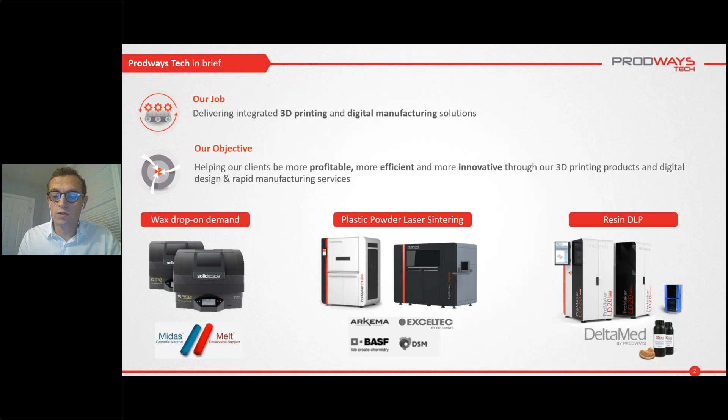In terms of printers, we have 3 product lines: wax drop-on-demand with the Solidscape brand, plastic powder laser sintering printers, and resin moving light DLP printers. Today, I will be focusing on the plastic powder laser sintering and the moving light DLP products, which are the ones most commonly used in industrial application and digital manufacturing.

So the topic today also is about how do we make sure that we work with our customer priority while we continue to develop our 3D printer and continue to innovate to make sure that we maintain this high quality, high throughput, and continue to drive the adoption of additive manufacturing while lowering the AM costs.

So what are the challenges of the digital factory today? What are the challenges that you're facing when you onboard 3D printing as the first printer to use it as a manufacturing solution, or as you scale up and onboard more and more printers to manufacture what you have to do? So the first aspect that we are looking at and considering is productivity.

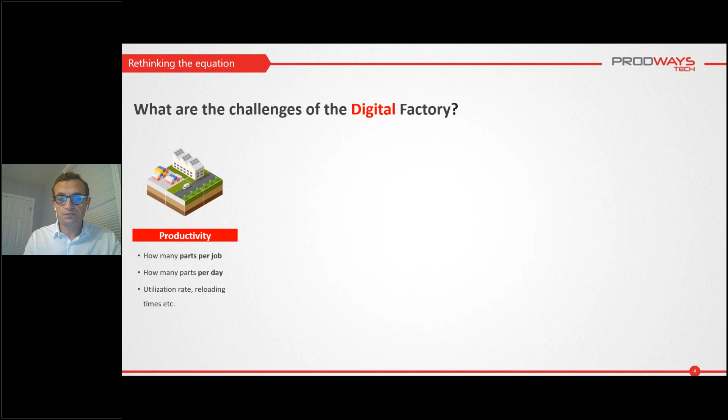Already productivity has to be explored according to various considerations. How many parts per job can you do? How many parts per day can you do? Which is a different view of the productivity, but also overall throughout the year, what is the utilization rate of your printer? How many hours per year have you been using the printer? What is the time off that you have using this printer? So we'll get a deep dive on these topics.

In terms of cost per part, again, there is various ways to look at the cost per part. You can look at the amount of material that you have been using to build that part, but you also need to look at the fully loaded cost per part, where you get the amortization and maintenance of the printer that is taken into account, consumable, but also other side effects, so that's the inefficiency of your printer and the hidden costs that you may see in using the printer.

Finally, part quality, that's an essential aspect of 3D printing. Of course, 3D printing will give you a lot of unique features, like the ability to manufacture individual parts, the ability to manufacture any volume of parts. But quality is also a challenge compared to traditional manufacturing solutions, such as injection molding for plastics. And so we want to have the highest possible resolution to maintain details.

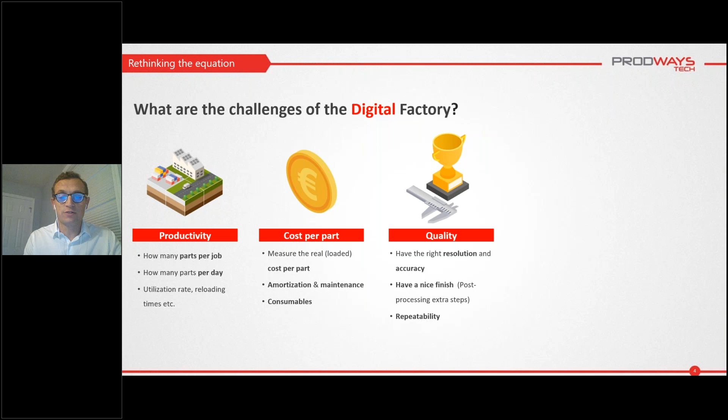We need to keep accuracy, have a nice surface finish, and also part of the quality is also the repeatability. How do you make sure that all the parts are the same from one printer to another, one day to another, or from one corner to the other corner of the manufacturing? So these are all the topics we'll look at in detail.

I will be focusing the examples on these two printers. The LD Dental series is a moving light printer from Prodways, which is a resin-based SLA printer, and the ProMaker P1000X, which is our latest addition in the SLS family, and that is now available at full scale with all our material.

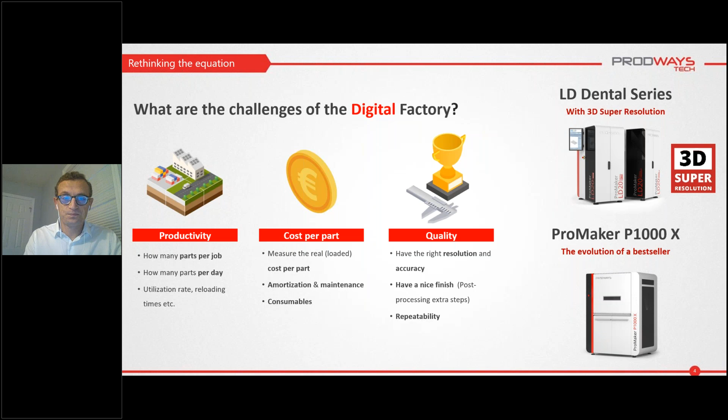So let's start with productivity. The first level you want to consider to make sure you have the highest possible productivity is at the printer level, at the job level.

For that, it's simple. You want to look at the technical spec of the machine when comparing different machines. Usually this productivity is directly related to the power of your machine, whether it's watts for the laser or watts for the lighting engine in an SLA or DLP printer. All that will tell you how fast you transfer energy to the material to make a part. Also, the build envelope gives you more volume and allows better use of the same job. So that's two aspects to consider.

Second, you want to look at the full cycle in terms of productivity. How long does it take to prepare? Because if you can print in 1 hour, but it takes you 1 hour to prepare the printer, that's really the cycle you want to look at. How fast can you reuse the printer? It's important to take good care in listing all the steps when using the printer, and also think about operations that can be done during nights and weekends. How do you optimize the long weekend print? That's also a topic to consider when you look at the full cycle.

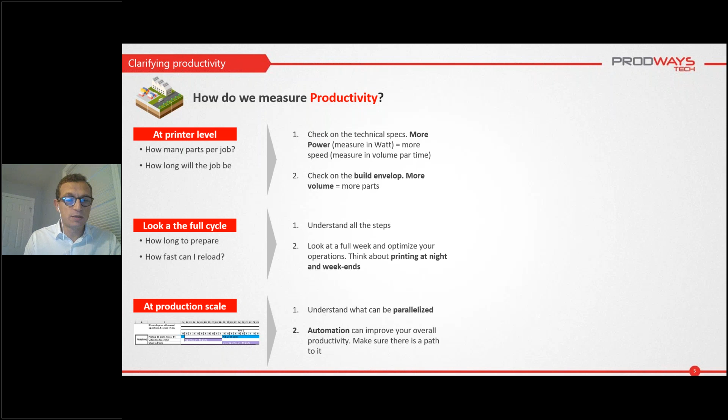Then you have the larger production scale, and this is a small example of a chronogram that some of our customers use to evaluate how they're going to use and assess the printer. It's important to understand what can be parallelized. If you have two printers, you may have the same person reloading one while the other is printing, and so on. Also, automation is the next step to improve your productivity, so you want to make sure there's a path to automation with the printer you're using.

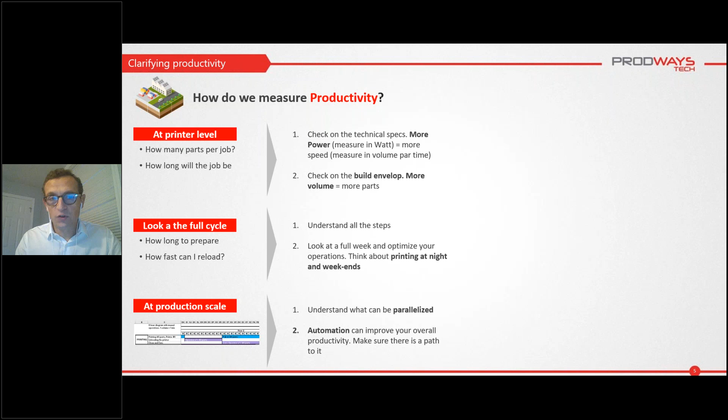So a few illustrations of this consideration on the products I was mentioning. On the moving light, for example, we have the LD20 that has two projectors, giving twice the wattage and twice the power. As a result, the printer has 30% more speed. Only 30%, because the printer is not always lighting - there are other steps where the platform moves and material is put back for the next layer. That explains the difference.

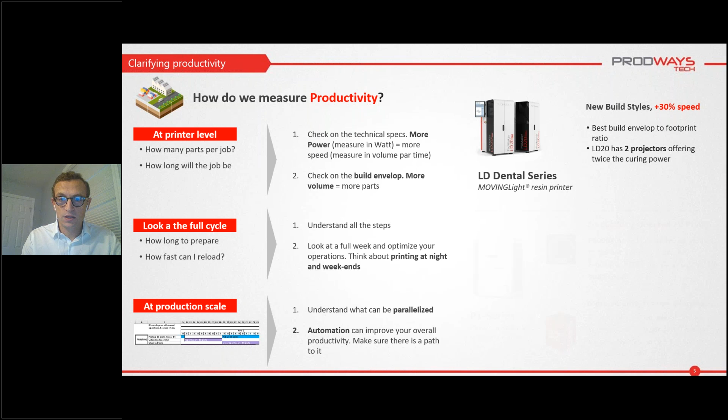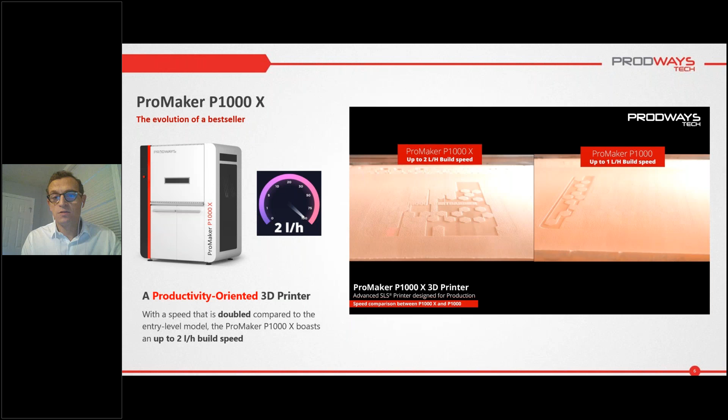We also worked on the software to play with various layer thicknesses and build styles, allowing for more speed. Same example on the P1000, and we'll see it on this video. The P1000X is an evolution of the P1000. It's been optimized with a new software approach, but also a new laser. You can see the comparison on the left side, which is the P1000X, and the right side, which is the P1000 - the video is now in real time. With the new software and power, we actually achieved twice the speed on the P1000X compared to the P1000.

Of course, there are many other aspects to consider when looking at the overall picture, but you can see immediately that comparing item to item from one printer to another, you'll be able to make sure you get the productivity you want, whether it's from a single job to the entire week, assuming how many parts per day you need to manufacture. That's actually the target you usually consider - how many jobs or parts you want to do - and you should build your solution from there.

So yes, as you see, the image on the right is just finishing the layer, while the image on the left is finishing the second layer, and that's really the example of the difference we have.

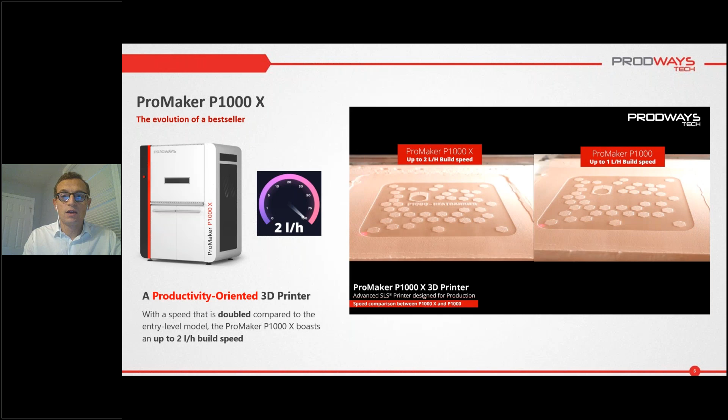So let's talk now about part quality and what it means for 3D printing part quality. The first aspect is, again, the core specs about resolution, accuracy, and I should say also precision - what is the smallest detail you can print. Also think about surface finish - all these printers, whether laser-based or image-based, have the ability to use the right software and algorithm to improve the way energy is transferred to the material to get a better surface finish.

So you want to check the technical specs again. Usually only resolution is mentioned, but sometimes people give accuracy detail, repeatability - how can you get the same position of the laser beam - and that will give you the right understanding of the kind of resolution you can achieve.

Also an important factor - quality can depend on material. The instructions for use, the kind of document provided with the material, will give you detail about the minimum wall thickness feature you can represent with that material. Also, especially with powders, they're not exactly all the same granulometry depending on their manufacturing process, and some materials will provide a smoother surface finish than others. So that's a starting point.

Second, it's about repeatability. If you get a nice part, how do you make sure that all the parts you produce on the same day, on two printers sitting next to each other, and across the year and across the build platform, are consistent?

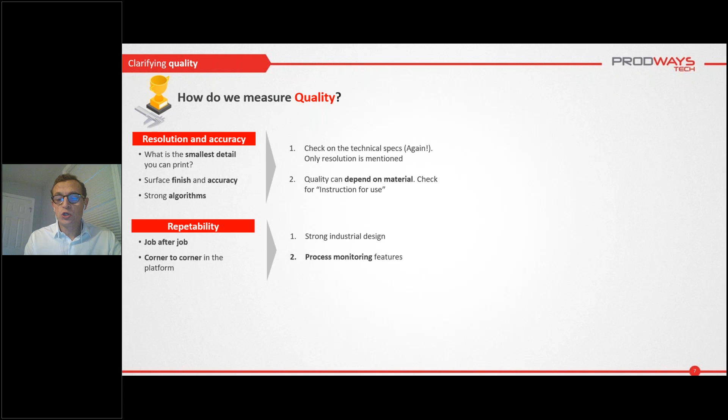It's really about how the printer was designed, and there's two aspects. First, strong industrial design will give you reliability and repeatability—you don't want the printer to age or move away from its original target too fast. Second, and important, is process monitoring: printers that embed closed loop control let you see and measure that you get accuracy.

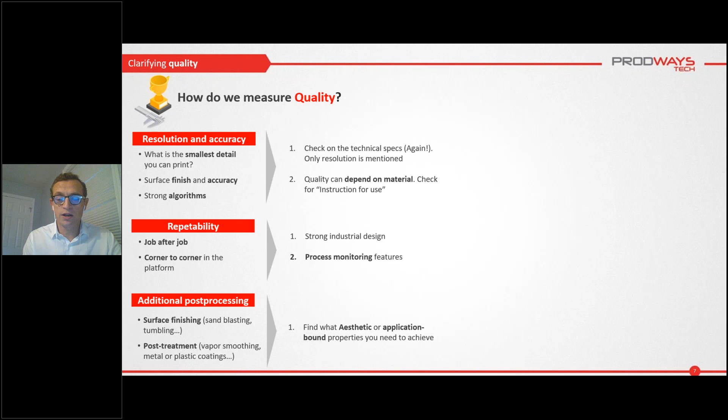Finally, it's important to consider post-processing—surface finishing, sandblasting, tumbling, or post-treatment like vapor smoothing and coatings—as a way to improve the aesthetics or even the application-oriented aspect of the parts. That needs to be fully considered in the picture of 3D printing. Some extra steps are very light, but additional steps might be as important as the 3D printing itself in getting the final product you need. I'll show you some examples at the end.

A few illustrations of this quality aspect. Again, on the LD Dental series, we recently released a software upgrade for 2021 called 3D Super Resolution, and you can see the comparison that gives a better surface finish using the light engine.

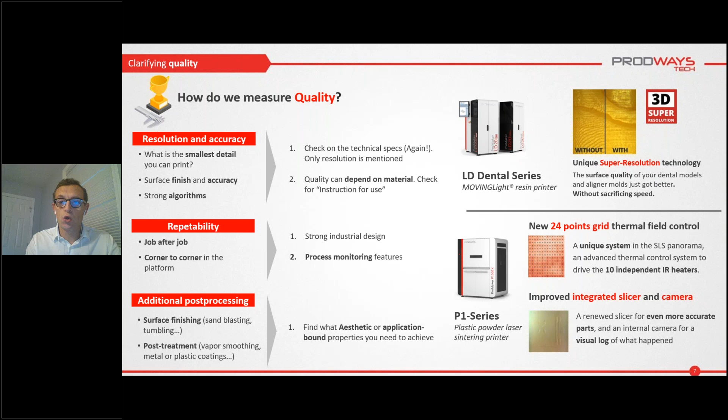On the P1000X, there's new thermal field control, advanced and improved integrated slicer and camera. You can see the image on the right showing the slicing update as the printer is building, and in the background the thermal control that makes sure we stay within boundaries and guarantee bed stability, which is the key factor for good parts from one corner to another.

So this is an example of this closed loop system. Again, the algorithms on the slicing and beam management are important for part quality.

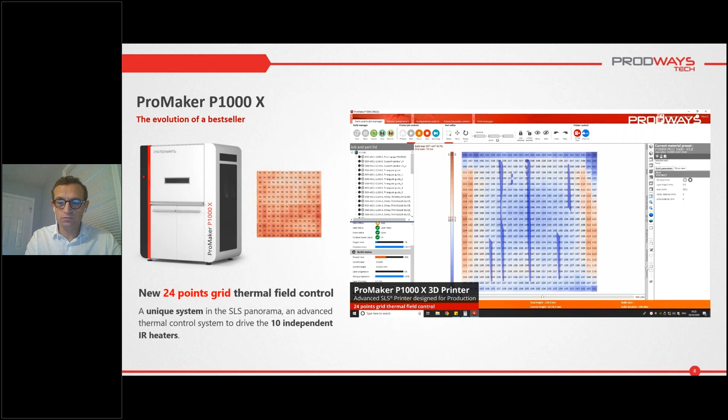Now that we've explored how to control quality and productivity, we've added a lot of great features—and those may be more expensive features, because you have a more powerful laser and more advanced control. So how do you make a total cost per part that is under control? How do you measure it, and what are the observables you want to look at?

Again, the first level is about printer operation. You want to consider everything—amortization and maintenance—know about the failure rate of the printer, and also keep an eye on the ancillary equipment.

If it's the first printer you're going to acquire or use, there might be a requirement to invest in additional equipment. That's an extra capex, but you might also share it with the next printers. So here, I'd say talk to other users—of course we'll tell you our printer works as it's supposed to, but we have plenty of happy users who have been able to operate a printer 24 hours a day, and that will give you a good sense of what it means to operate that printer.

Also, you want to look at your yearly budget—do not forget to include maintenance for an industrial printer. That's an essential step in your quality of operation and avoiding failure rate to maintain the equipment.

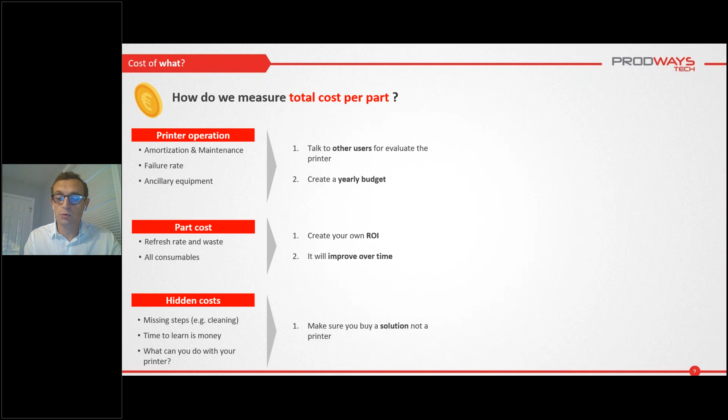So for all this, I would say make sure that you look at the complete solution and that you buy a solution. You don't want to buy a piece of metal that has a sticker that says '3D printer.' You really want to make sure that you buy a solution that will manufacture and get what you want from the printer.

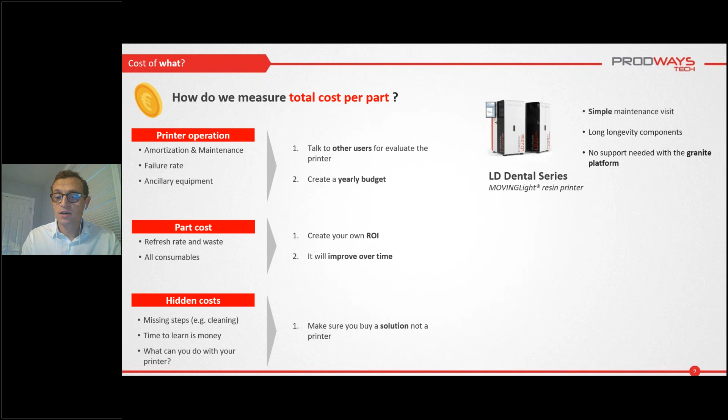On the P1000, again, a few examples: our TPU material has only a 10% refresh rate, meaning you only need to add 10% of new material to the blend for the next print. You will use all the material you have in the printer, which is a great usage level for the material. And again, there is very simple peripheral equipment to use, of course with more manual steps. That's the trade-off between your cost per part depending on your volume and manufacturing scale.

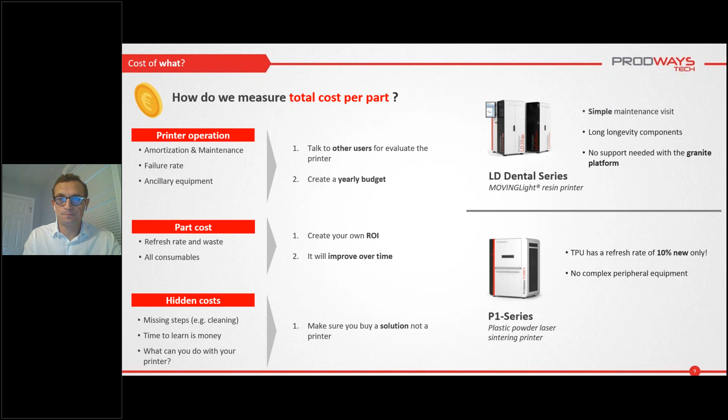And again, as I was mentioning, think about everything you can do with the printer. When you have this large portfolio of materials—TPU, PP, PA12, PA11, medical grade, glass filled—all available in the same printer, it means that versatility will be a way to better amortize your project and do more with what you have in-house. So that's an important aspect.

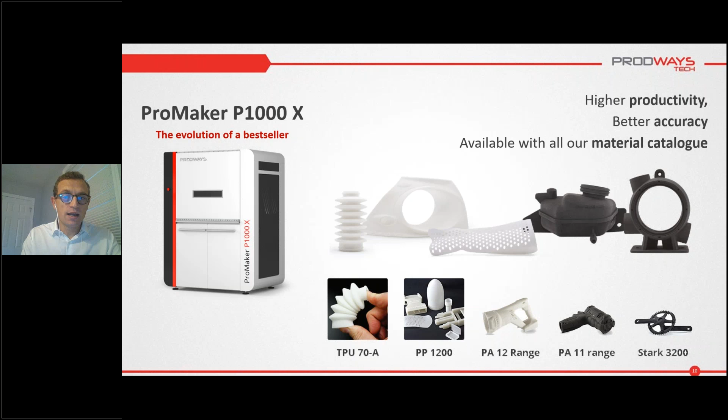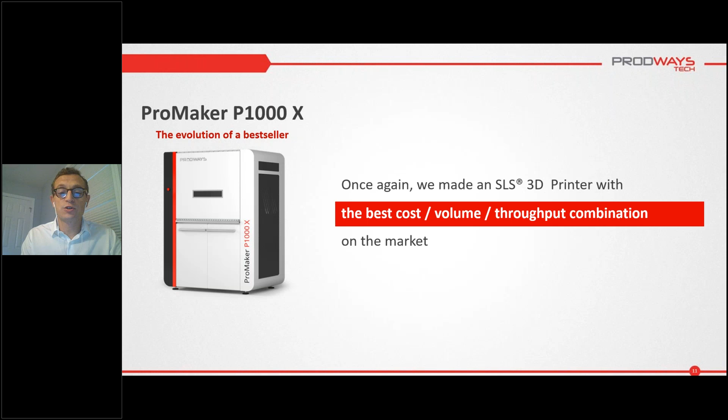So now let's go through a few customer examples that have leveraged the P1000X as their solution for 3D printing and additive manufacturing.

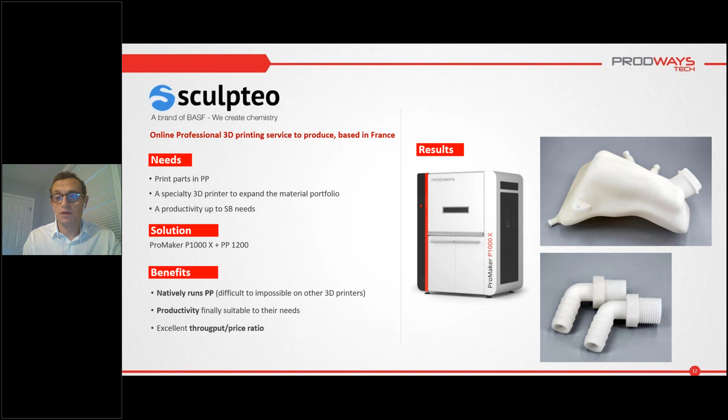Sculpteo is the French service bureau. They needed to onboard new applications and new materials, in particular polypropylene, and they went with the P1000X with the new PP1200. The printer natively runs PP, it was qualified for it, so there was no learning curve to bring a new material onto the printer. The 2 liters per hour was what they needed with this material, and the investment with the P1000, being one of the lowest entry points into the market, was what they needed to explore this new area. So you have some examples of what they could build, and it was really a seamless integration for them.

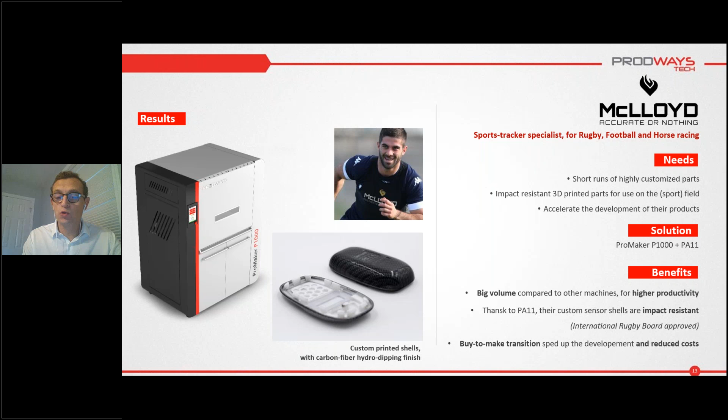Another example, McLloyd. McLloyd manufactures sports trackers for rugby, football, and horse racing. They needed to make short runs, a good finish look, and products that were also impact resistant for these kinds of sports. So here we qualified the PA11, which has robustness but also some elasticity, and they could run a large batch of prints in a single job because of the big volume. The material performed well with the post-processing steps added after printing, and the final product met all their expectations. They are now happy with their decision to in-house the design versus buying finished parts outside.

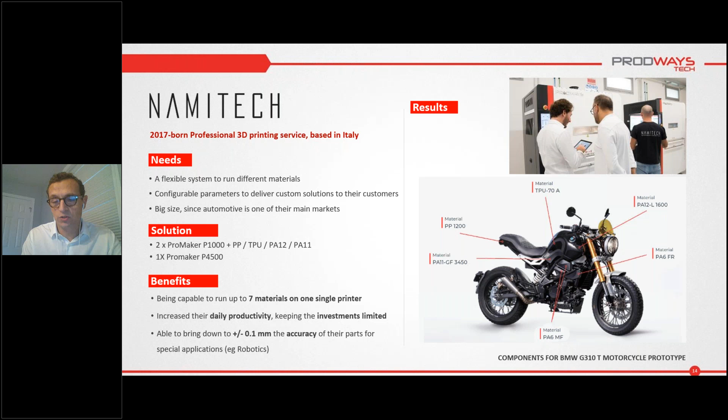As a conclusion, we know that finding the right printer and making your project go where it's supposed to be in terms of cost is a long journey, and we're trying to work with all our customers to create this framework. It's extremely important that you can build a solution around your 3D printer, because this will evolve over time. I don't know of a single customer that is where they were when they started. You always evolve, you always grow, and this long journey can bring you everything you need in terms of part quality, but also part cost. Working with a total solution approach is the way to get you there.